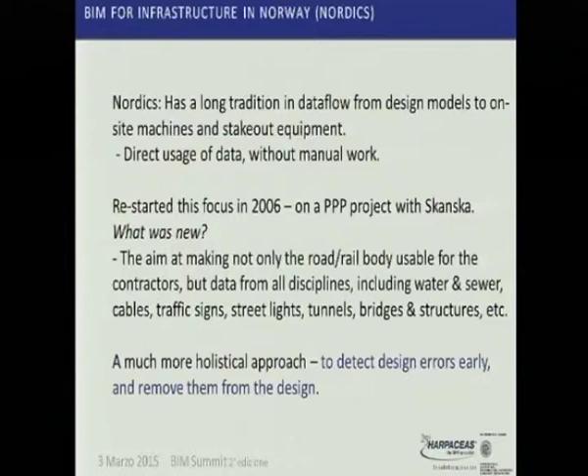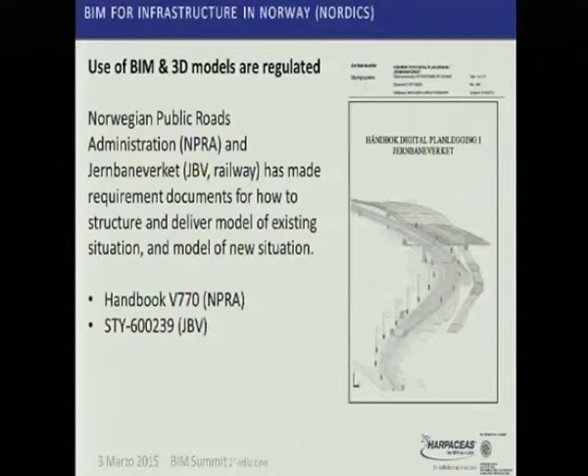So what does BIM for infrastructure mean in practical life? I know that many of you are dealing with buildings. Maybe it's very similar, but there are some differences. For example, we care so much more about the existing environment because we are putting the road and the rail into an existing situation where we have interfaces with a lot of information related to that. But we do discipline models also like in the building industry. You have road and you have water and sewer and these different disciplines. But we put them together in one model.

One thing we have been working a lot with in Vianova is to make models that are usable for the contractor. They should not only be nice looking, they should not only be clash-free, but they should be ready to use directly. I can give you one example. If you have a manhole for water and sewer, it can be in full 3D and perfectly placed.

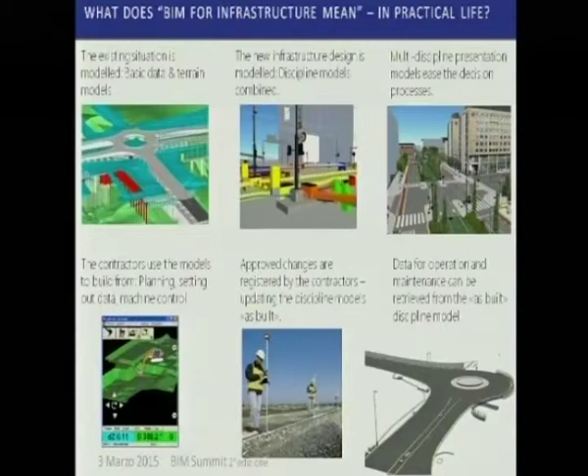But the contractor cannot normally use solid objects directly. So what we do is that we add the points and the lines directly in the design software so that the contractor can turn off the solid information and use those points and lines straight out of the model. As an example of something that you would maybe not think about. But here you shouldn't think as a designer, you should think as a contractor when you are putting up the model. Yes, I will come back to some more of this, so I will not go into all the details. I don't have time for that, I think.

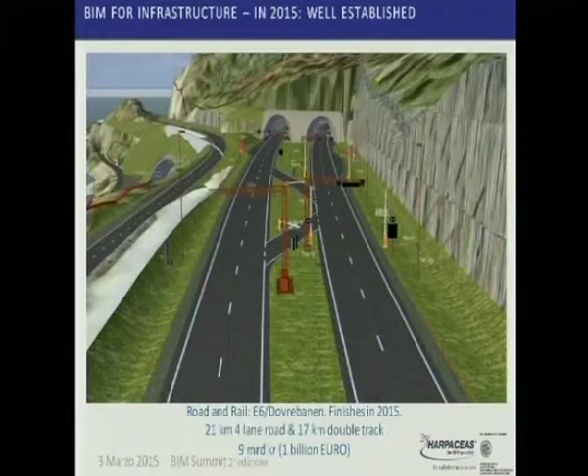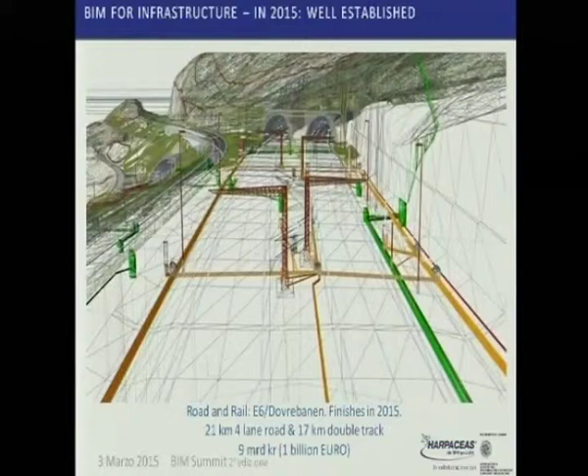This is one of the latest projects that are now built. It's both road and rail altogether. 1 billion euro is the contract. It was actually 3 contracts, 21 kilometers of 4-lane road and 17 kilometers of double track. And if you go down under, you see all the elements that should be there, and they are designed clash-free and ready to be built together with the contractor. Same project. Here you see the railway.

Same project. Here you see clashes found. They find a lot of clashes, and they fix them. They have meetings in this project, normally every 14 days, where they meet with the projector and see the model, go through the project and find the clashes, and go through the clashes found in the last meeting, and they go around and around.

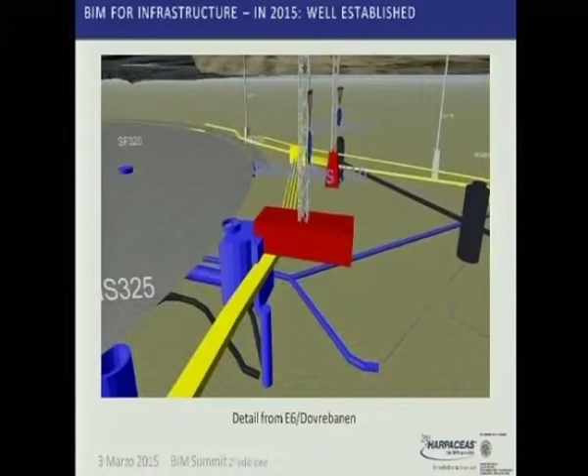And the contractors have said, for many projects, they couldn't find defects in the model that are related to the design itself. Of course, they find problems related to the existing situation, with problems coming up from the ground. But in the design objects, very few defects. What happens sometimes is that the contractor builds differently than the design, so then they have to redo some other design to accommodate that.

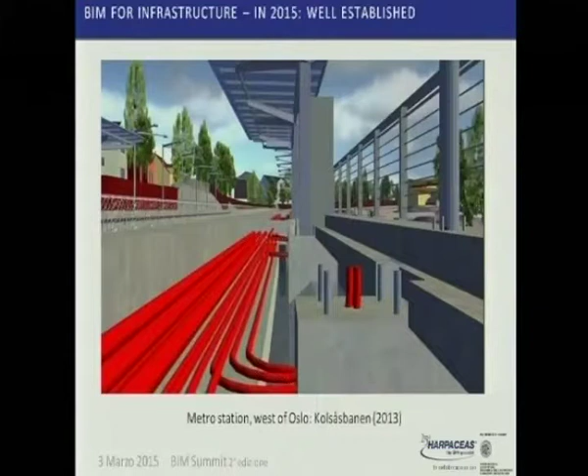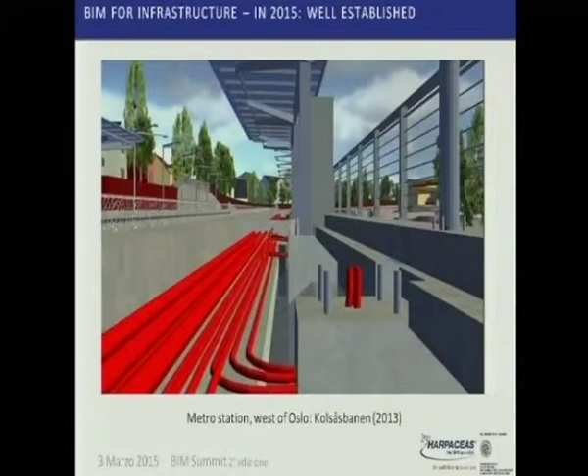This is an example of how detailed it is. This is the cabling inside of a metro station. All the cables are modeled in 3D into the concrete objects and everything, so that you can really be sure that this is buildable. You shouldn't get any surprises out there. Same station with an overview.

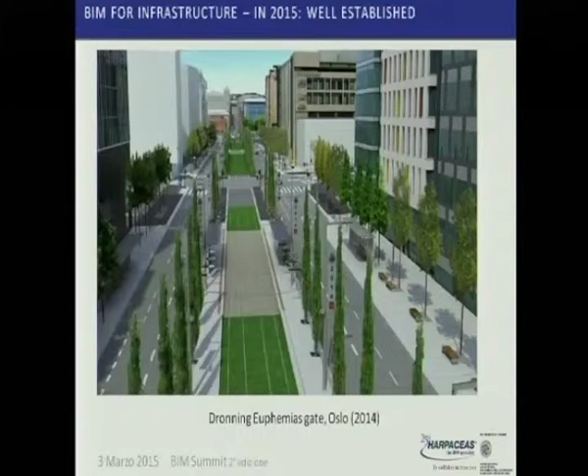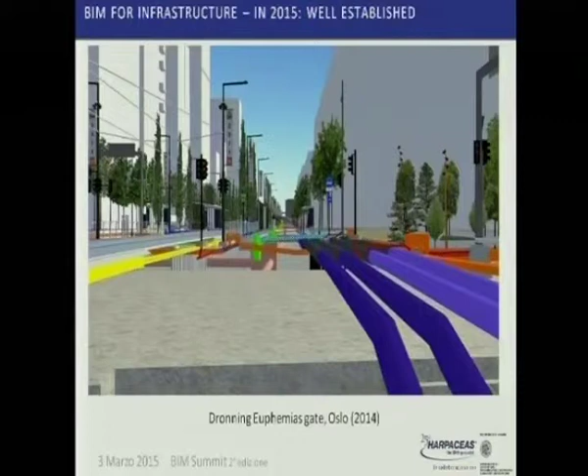This is in the center of Oslo, a completely new street that has been designed and is now mostly built. Same here, you have a lot of objects underneath the ground, and as Skanska said, they have never received a model that had this level of detail.

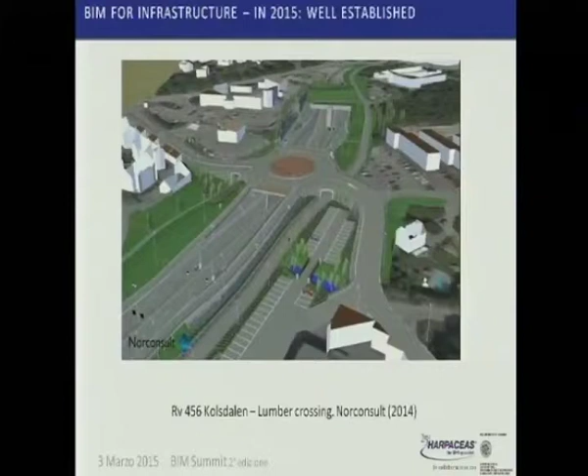As the contractor said, before we wanted to have 3D models, now we get them, and now the problem is us. We have to handle all these 3D models. Another project, again the same there. So this is how it's looking, BIM for infrastructure. And it's not only road infrastructure. When you have a road, it's also all the other infrastructure that goes with the road.

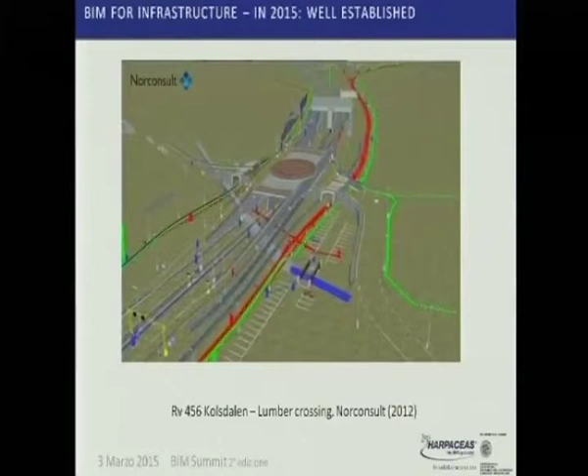So a little bit about the process, a little bit simplified to get into the framework of 15 minutes.

How much do I have? Well, as you are the only foreign host, I can give you 5 minutes more. Oh, fantastic. Coming all the way from Norway, thank you.

Step 0, the initial phase. Use time together early, the designer and the contractor. We never see a good BIM project where you do not have good communication between the designer and the contractor. That doesn't happen because the process is so new to everyone, and you have to handle it day by day, and if you don't have the communication, forget about BIM.

And you have to educate the people, the contractors and the people that are going to do the stakeout and everything. You are using different software. You have to be sure that the data coming from the design software is going well into the contractor's software, and they have so-called geomatics meetings where they meet and discuss, for example, a tunnel portal going from one software to the other, and they lost some and had some problems, and they had to have a meeting to fix those problems. Communication all the way.

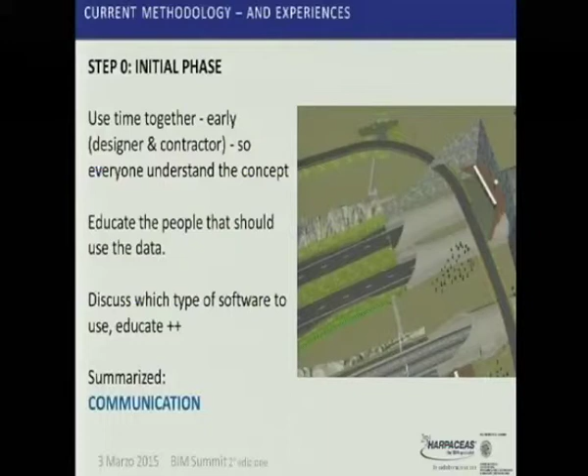And then they have a model repository. It can be a web hotel, as we call it. That means a file hotel. It can be Vault, or it can be ProjectWise, or some kind of that. But you also now get what we call the BIM server, which is something that we have in Vianova, a database where all the data is in one single model. And they handle this process of updating this repository. And they have routines for that. That is very important.

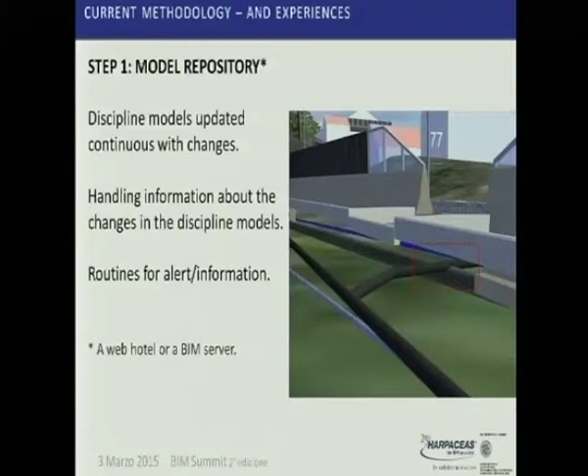And then they are using this collaboration model, as we have been calling it in Norway. It's a model where you collaborate. You collaborate around this model. And everyone should use it actively. This is a way of understanding the project.

And they are using what they call the topics or viewpoints. Topics is the name from buildingSMART. Some software use viewpoints or model comments, but they are digitizing the communication around the model, and the communication is following the model. And this is what they do every meeting. They go through this list of issues stored as model comments or topics. And because these are always large models, they are using various techniques to handle the size of it and to reduce the amount of information on the screen. It can vary from software to software.

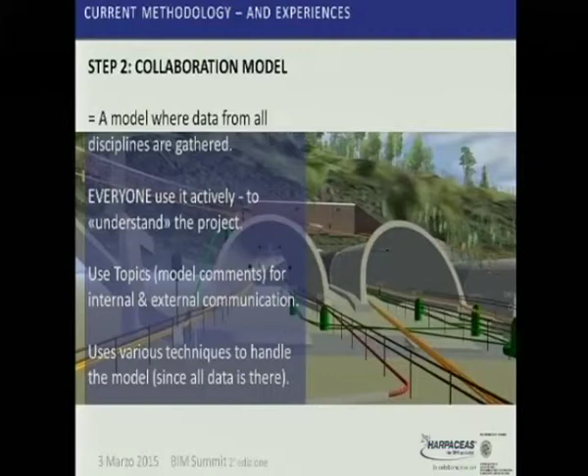And then the fun comes where you should be able to take stakeout from the model, as I already mentioned. And the data has to be understood from the contractor's point of view, and it should be possible to use it straight away, directly, with no manual work from the contractor's side. This is where we feel that some people are losing that very important point. And how to do this? Well, communication between the designer and the contractor.

And then, when you have built something, the next is that they also measure in what has been built. For example, let's think about a cable. They measure it in, and they bring it back to the collaboration model. And why do they do that? Because if it has not been built quite as it should, they can maybe see there will be a clash with something coming in the next phase. So then the contractor again can take action either to fix what was built because it was actually wrong, or actually to do a redesign because maybe that is cheaper. But to have that information in the collaboration model is also crucial.

I hope I don't speak too fast English, but I can see that everyone is understanding, so that's good.

We are now coming into a process where you have a really high quality as-built model, which should have a high value both for the project owner and for the society. So in Norway we are bringing this data into the National Road Data Bank and National Railway Data Bank, and we have a process for that. It's not so that the National Road Data Bank has the level of detailing as a BIM model, even though we would like it to. But we try to use the as-built model directly as much as possible to store back to the National Road Data Bank, so when the road is opened, the new road network is already there, so that cars can drive safely along with TomTom.

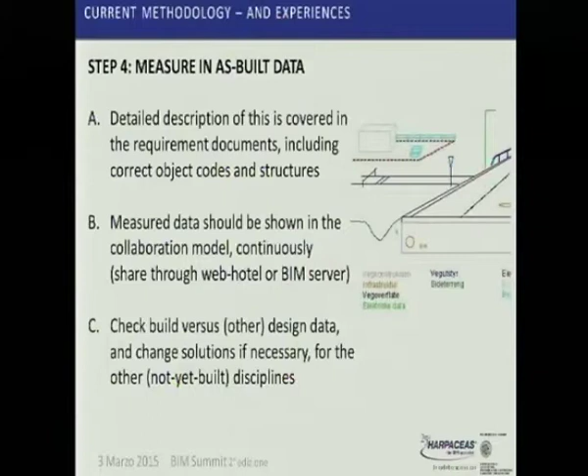Savings. We found together with the national road authorities a reduction in cost of additional orders, from an average of 19% of all contracts for national road authorities. That was the average for all the contracts, 19% on top of the original contract. But the contracts using BIM for infrastructure or 3D modeling came to a level of 7.5%. So a substantial reduction in extra costs, and the road authorities were quite happy with this. Even though it's quite a limited investigation, it's a very clear result - there was no doubt that the methodology gave savings to the road authorities.

And we have an approximate number of 1.5 billion euros saved for the nation every year because of this. But that was only one dimension measured.

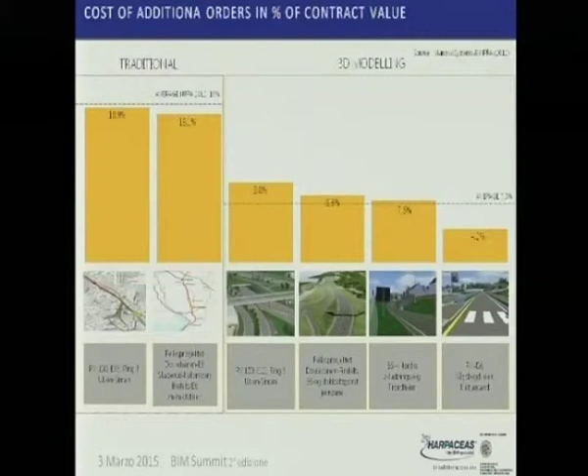Okay, some short advices as we see it. Get the process right - it's more about process than software. It's more about communication across companies, across organizations, and also between disciplines. So you have to remove the silo thinking. You have to work in the same room.

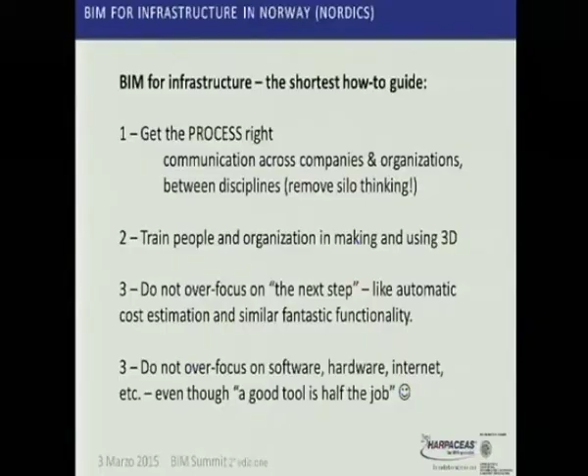Train people and organization in making and using 3D. We actually state 3D here and not BIM, because there are many in the infrastructure world not even using 2D correctly, some are still using schematics. So they have to jump from a schematic drawing of cablings, for example, to a full 3D model of the cablings, and that's quite a lot of a jump. They have more than enough to think about how to do that than thinking about how to utilize BIM in the next steps.

So we say do not over-focus on the next steps of BIM talk, like automatic cost estimation and similar fantastic functionality. I'm sure it will be fantastic, but it would be very nice if we could bring the whole community to a level where everyone is saving a lot of money for society because of using 3D that is usable for the contractors.

And we also say do not over-focus on software, even being a software company, and hardware and all that stuff. But of course, a good tool is sometimes half the job, so don't forget it either.

So what we think will happen in the next 1, 2, 3 years - as for building, you have a fantastic format in IFC, but we don't have that for infrastructure. So we need to focus a lot more on open standards in infrastructure. We have two initiatives: ISO 19100 series, coming from the GIS world, Open Geospatial Consortium, and ISO 16739, which is IFC. VIANOVA contributes to both of these organizations, and we think both are needed for outdoor infrastructure.